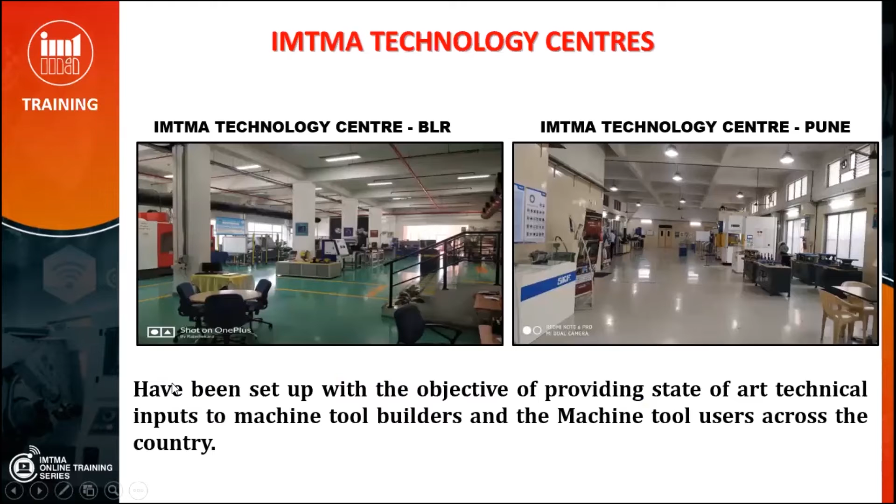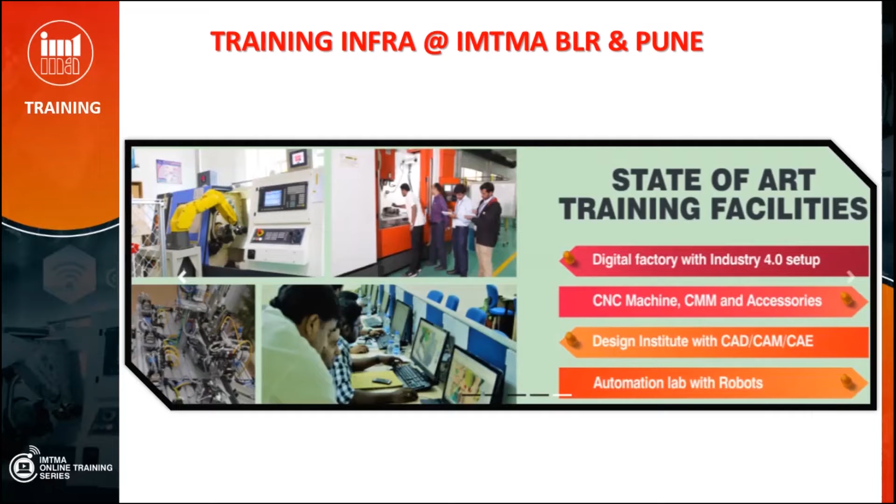Our technology center in Bangalore and the technology center in Pune, each of these facilities are fully equipped with all the requisite machinery, metrology equipment, accessories, automation lab with robot, and is completely Industry 4.0 ready. We deliver our training programs in 4 different ways: short-term programs, in-house programs, e-learning, and long-term courses meant for young graduate engineers.

Our classroom training programs are delivered by experts who have experience in excess of 30 years, with a blend of theory and hands-on training wherever possible. We supplement the programs with demonstration of live machinery or industry visits wherever possible. And we encourage a healthy interaction between the participants and the faculty through the program.

Our e-learning initiative is delivered through an exclusive e-learning portal, and the current portfolio is about 10 programs which can be accessed by the participants at their own flexibility during the license period. The entire program can be taken at their own convenience and flexibility, with assessment, evaluation, and certification being provided through the e-learning platform itself.

Ever since April 2020, we have come up with the online training initiative, and till date, we have completed over 300 programs, addressed over 15,000 participants, and we have made these programs easily accessible to various types of participants, which can be taken up at a minimum training budget. We enable live instructor-led programs with interactive question and answer sessions, polling, chat box, and we also provide live demos wherever possible during these training programs.

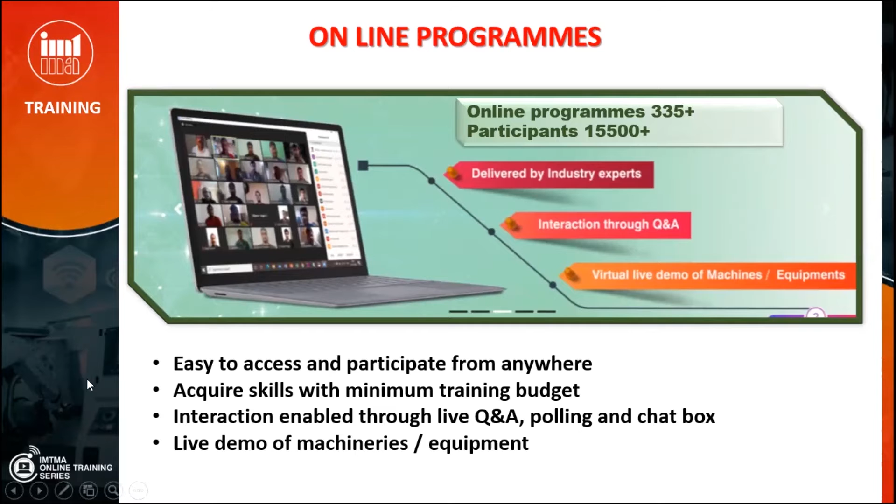Long-term programs are primarily meant for young graduates who wish to improve their employability prospects by taking up a few programs on design, production, automation, FEA, and these programs are available in long-term mode for young engineers.

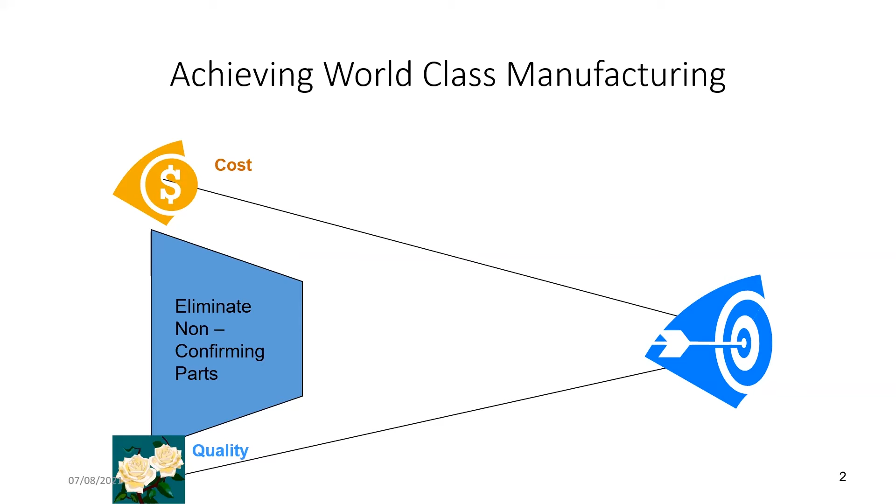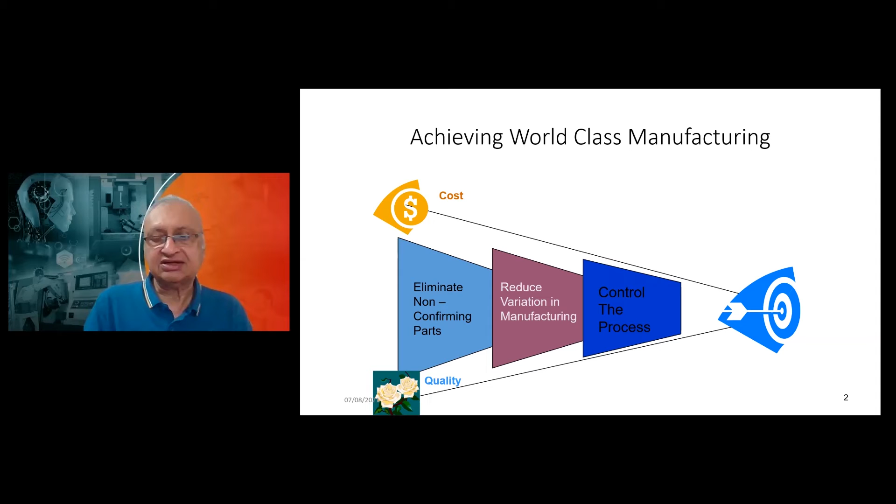However, when a process produces non-conforming and conforming parts together, it means our process has too much variation. So the next step in our journey is to reduce the variation in the manufacturing process itself, so that we do not produce non-conforming parts at all. This is the most important step toward world-class manufacturing, and it means controlling the process itself. Moving from elimination of non-conforming parts, to reducing variation, to controlling the process, is the journey for world-class manufacturing. We cannot control anything unless we measure it, so measurement is key to control of process.

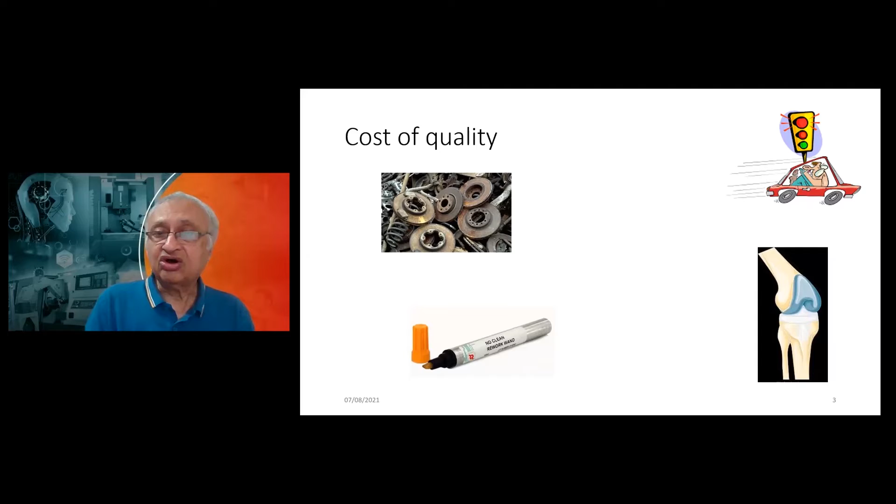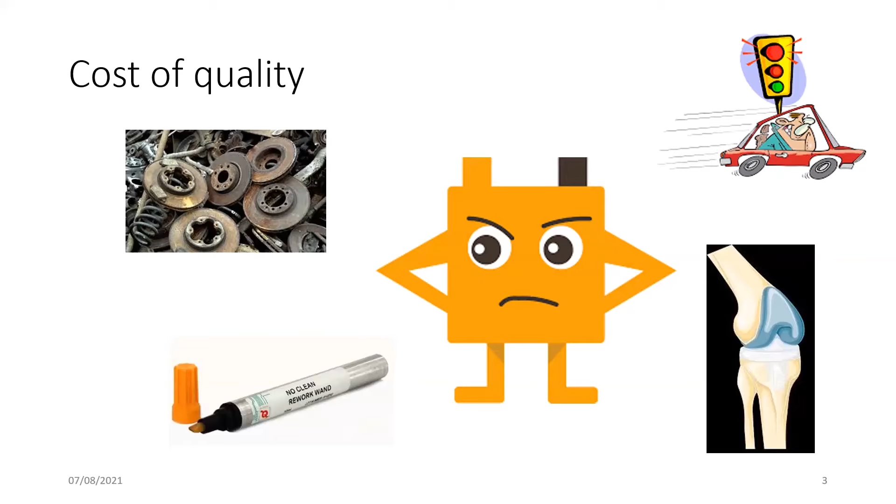A very big cost arises if this quality problem is seen at the customer's end, and you need to do a replacement, like a knee replacement - it's a very costly business. Not only is it costly, it also means your customer is not happy with the situation, because all this results in higher cost, which is ultimately borne by the customer. So anything that helps you measure and control your process ends up reducing the cost of quality.

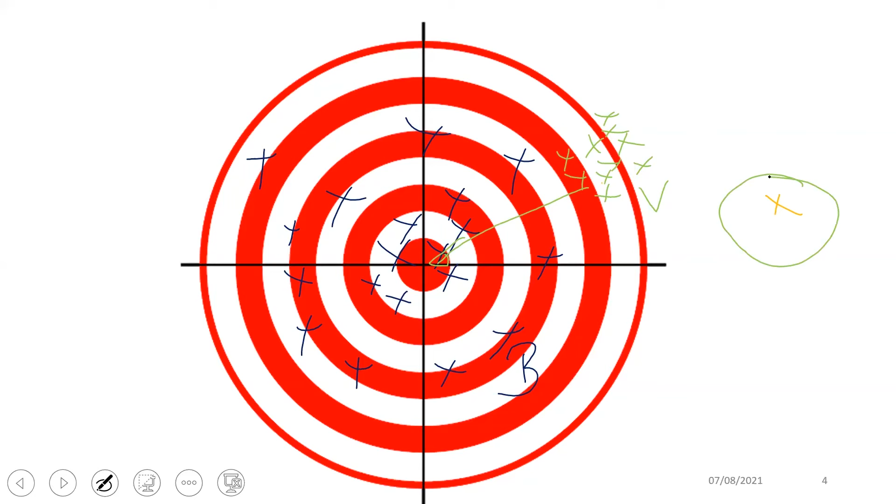So in the language of process capability and SPC, we talk about three possible variations, or three special causes. What we call Vishnuji's situation is known as special causes. Bhupendra ji has common causes.

And this one out here is what we call an outlier. So we have these three types of variations which could have possibly happened in our process: special causes, common causes, and outliers.

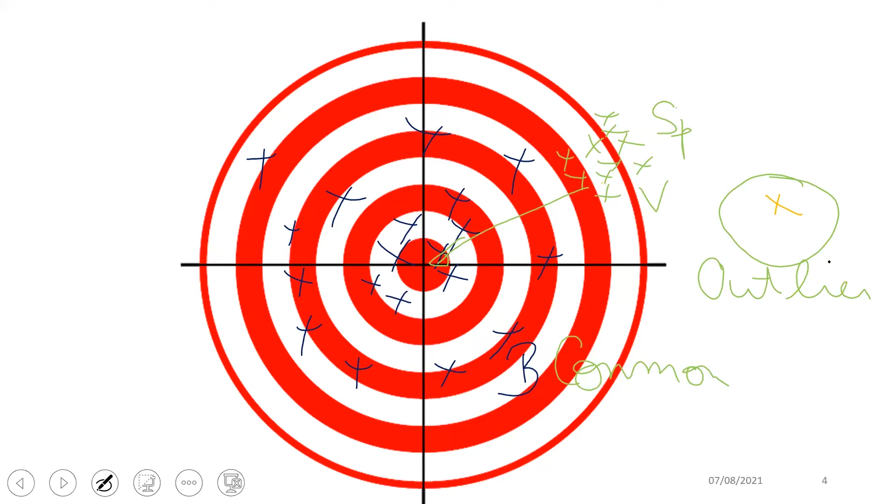However, if we allow many shots over a period of time, I'm sure Vishnuji would have corrected and brought his process to the center. Similarly, Bhupendraji could have possibly made improvements in his process, and hopefully the person who shot an outlier would have corrected his thing.

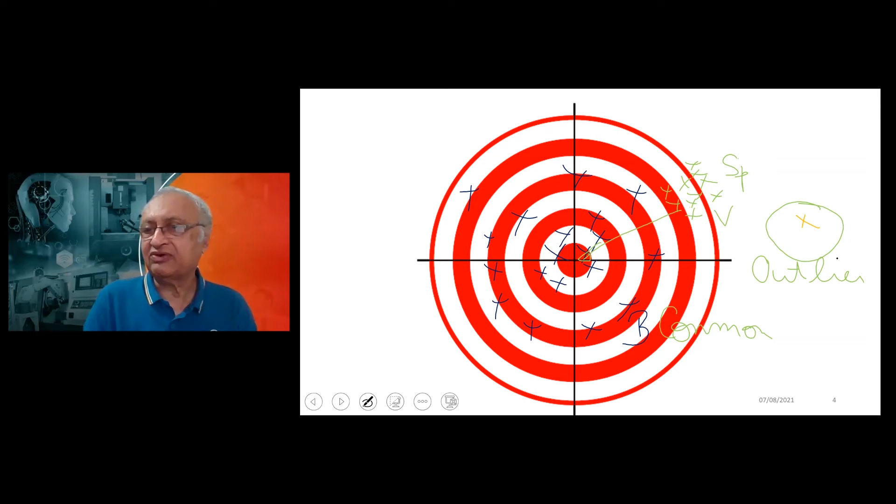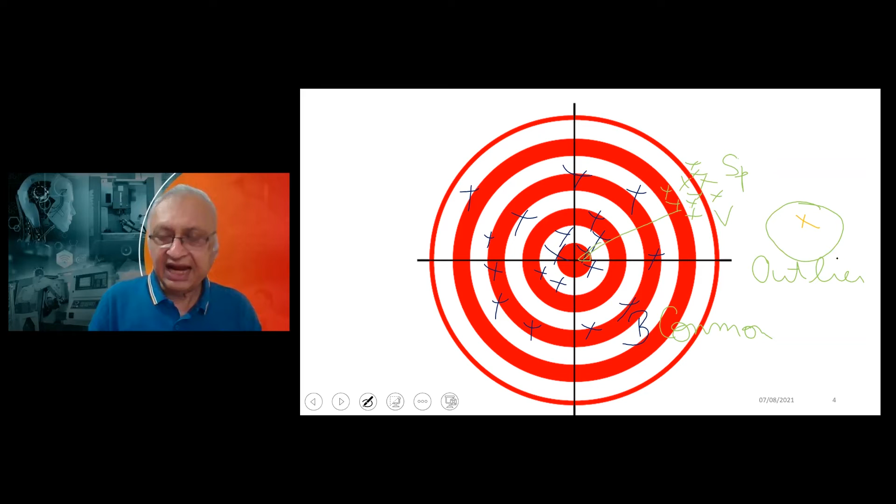Then over a period of time, we find that in most processes we have a distribution which we call a normal distribution. So normal distribution is a frequency distribution. In this case, the frequency distribution of Bhupendraji would look something like this, and that of Vishnuji would look like this. This shows the variation in Vishnuji's distribution is of a much lower amount as compared to Bhupendraji.

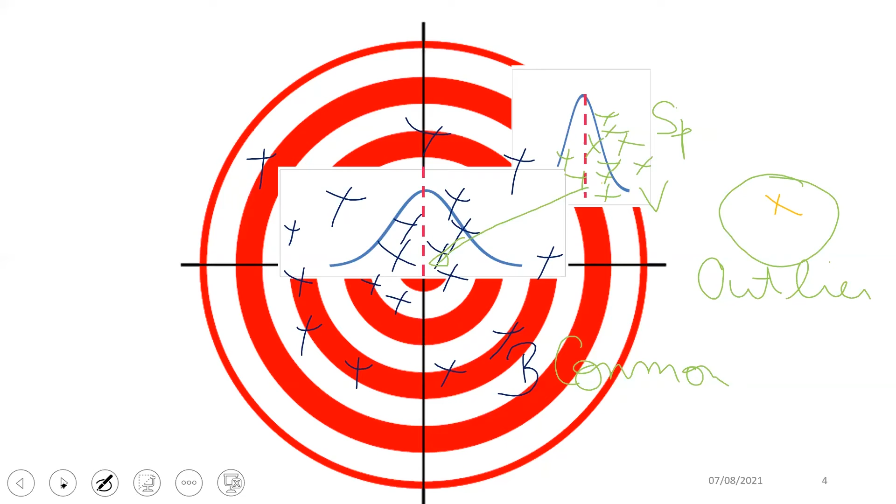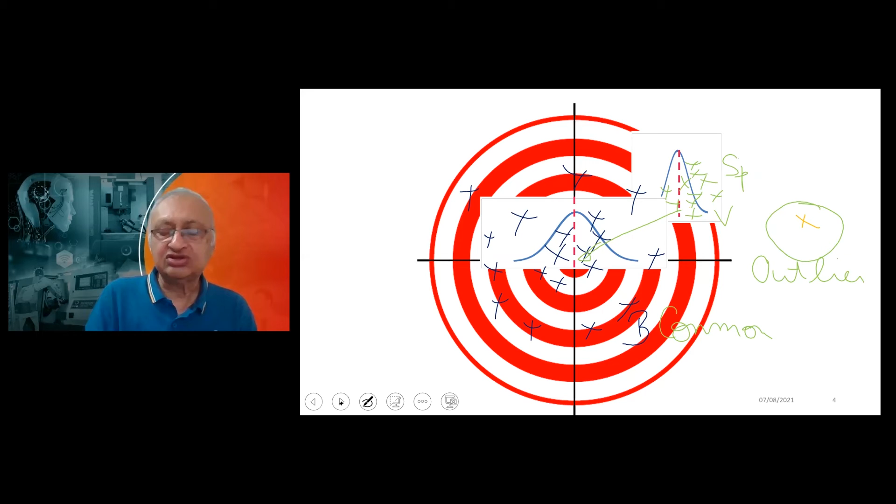So in our terms, we call this sigma or standard deviation. Standard deviation is a measure of variation, and that variation in case of Vishnuji is much less than that of Bhupendraji, though Vishnuji has drifted away from the target. Ultimately, in our processes we would like to produce only conforming parts, in which case Vishnuji would produce some non-conforming parts, even though his variation is low. I hope this is understandable to most of the people out there.

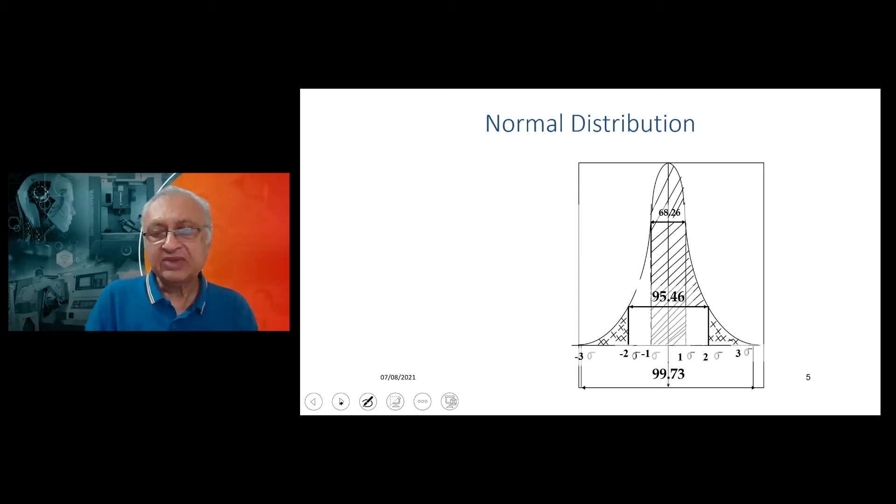So this normal distribution has some interesting properties. If you plot this normal distribution and divide it into different zones, you have the mean, which is at the center here, and then on both sides you have plus sigma, or plus the standard deviation, and minus the standard deviation, and the area under this curve corresponds to around 68% of the distribution.

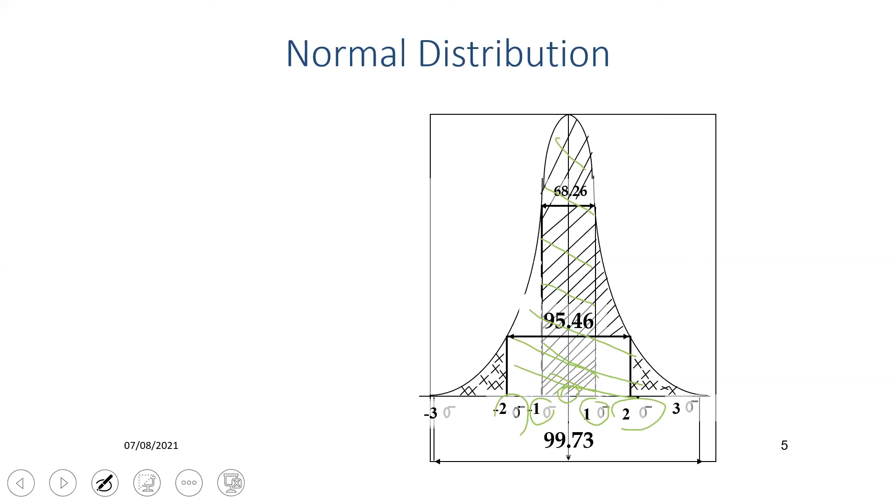If you then take it further up to 2 sigma and minus 2 sigma, we cover a further 95% of the distribution, that is the area under the curve. And if we take up to 3 sigma and minus 3 sigma around the mean, we cover 99.73% of the distribution. What this means is that if we have sufficient data, and if our distribution is that of a normal distribution, which is there in many cases, we would be able to predict that 99.73% of the time, the shot would lie within the plus minus 3 sigma limit. However, you must also note that there is a 0.27% which goes beyond the frequency distribution as shown here.

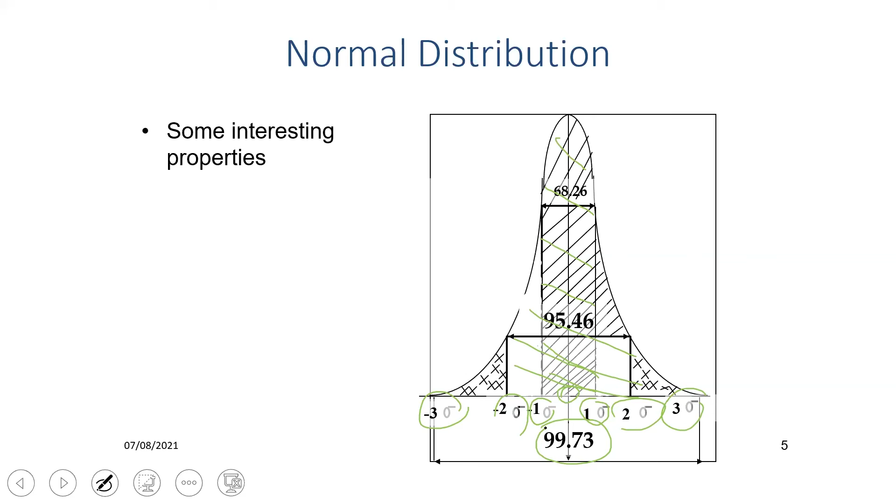So to summarize, the normal distribution has some interesting properties: 68% of all the numbers, or the area under the curve, falls within plus minus sigma. 95% of all the numbers falls within plus 2 sigma and minus 2 sigma. 99.73% of all numbers will fall within plus minus 3 sigma. However, 0.27% falls beyond plus 3 sigma or less than minus 3 sigma around the mean. So this being the mean, we are able to now project and predict what our process is likely to perform in terms of its quality.

This is only true for normal distributions, which is something you must remember at all times, because there are many cases, or at least a few cases, where the distribution may not be normal, and this rule we have stated about the areas under the curve will not follow this pattern.

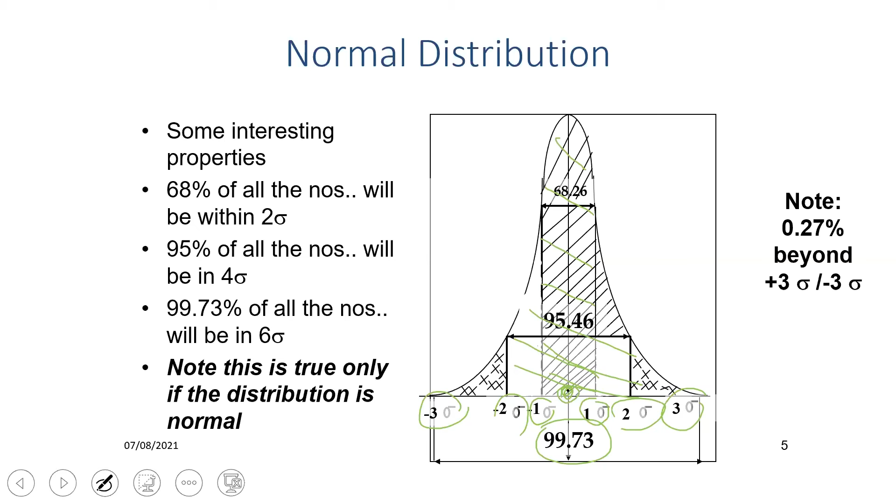So to estimate the standard deviation or sigma, there are two different methodologies used. On an ongoing process, we plot what are known as X bar R charts. If you plot these X bar and R charts, then you can calculate sigma equals R bar by D2. Now, just to explain the plotting of these charts a little bit.

Try to imagine you are in front of a process. Maybe at 7 o'clock in the morning the shift starts, and you take a sample, say of 3 pieces, and you find out the average or mean of those 3 pieces. This is X bar. Now you do the same sampling at every half hour interval: 7 o'clock, 7:30, 8 o'clock, 8:30, and so on. And you keep plotting these X bars. So this is your X bar chart.

Also, you take the maximum and minimum, the difference between the maximum and minimum of each sample, and plot that. That is known as the range, so that is the R chart. So first is the X bar chart, this is the X bar chart here, what I've shown here, and here you have the R chart.

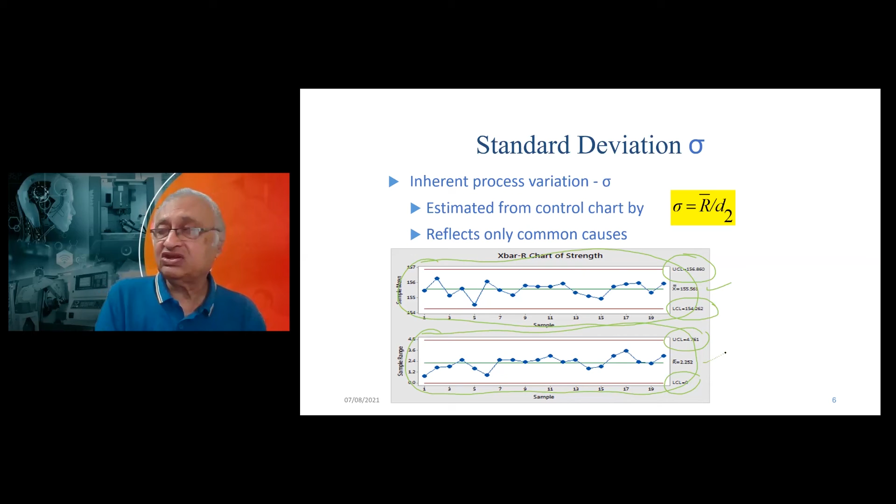In case of our friend, the second person B, the plots would lie within the upper control and lower control limit, which means that he is lying within the plus minus 3 sigma limits, and we are able to predict what likely he is able to shoot over the next, say, maybe 10, 15, 20 shots.

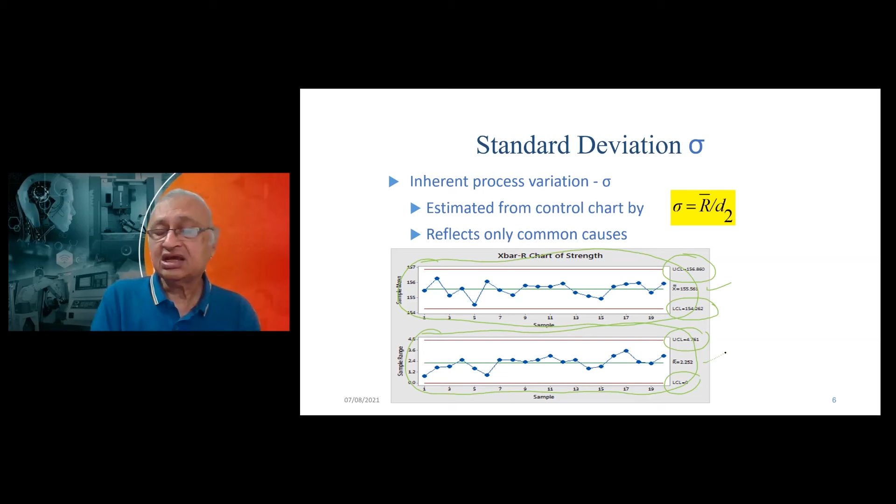So this is how control charts are used to predict the process. It's a measurement of the capability of the process. But please note, this has nothing to do with what you expect as a customer. We are only talking about the variations, the inherent variations of the process caused by common causes.

So this is the method of measuring sigma and finding out the limits plus 3 sigma and minus 3 sigma, so that we are able to predict where 99.73% of the parts will lie. That means that many conforming parts this process will continue to process and manufacture over a period of time.

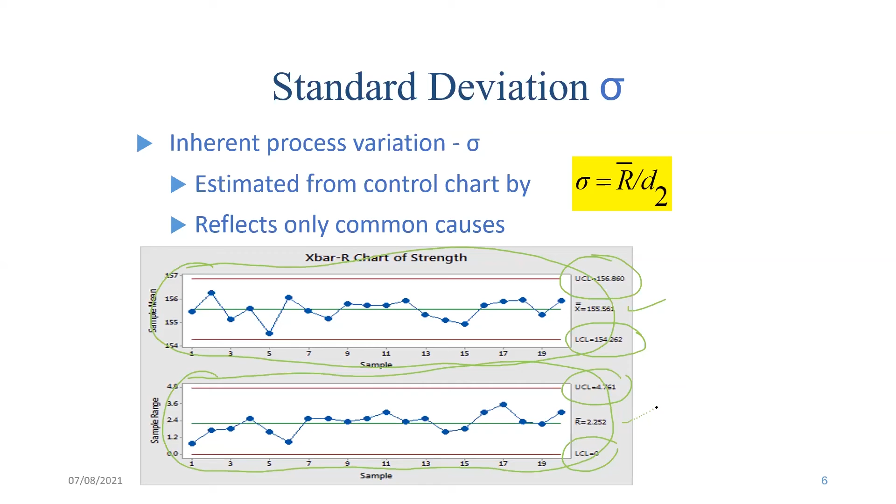There is another way to measure the standard deviation, and that is by a formula, and that's sigma. To differentiate from the other one, it is sigma s, which is the square root of the sum of xi minus x bar, each squared, divided by n minus 1.

Now xi here is an individual reading. X bar is average of all those readings. Each of them is squared, and then you sum all of them and divide by n minus 1 and take the square root. So this is known as the total process variation.

So now you can imagine that unlike a control chart, here is a case where you have a bin which may be around 500,000 pieces lying in it, and you are drawing from it a sample of maybe 50 or 100 pieces, measuring each and every one of those sample pieces.

Find that is the xi. Xi means x1, x2, x3, etc. Finding out the average of all of them, that will be the x bar. Finding out the difference between x1 and x bar and squaring it, and adding to that x2 minus x bar squared, and so on and so forth.

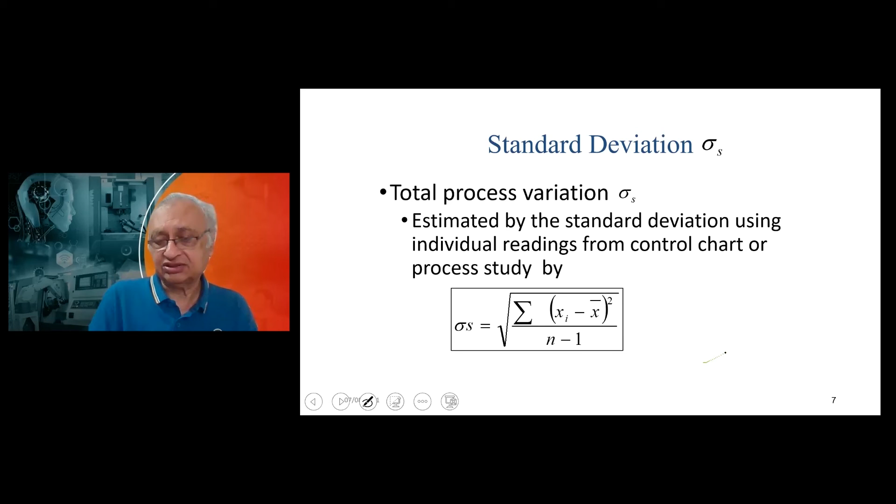So here you are not really worried about when those parts were being produced. So this is not for process control, but this is a post-mortem exercise to find out the quality of the parts in a lot. So this is the difference between sigma and sigma s, and we will see how we use sigma and sigma s in the next few slides.

So now we know what my process is capable of producing. The next part is I would now like to know, will it produce good parts for me in future or not? Which means I must compare what my process is capable of to the target itself.

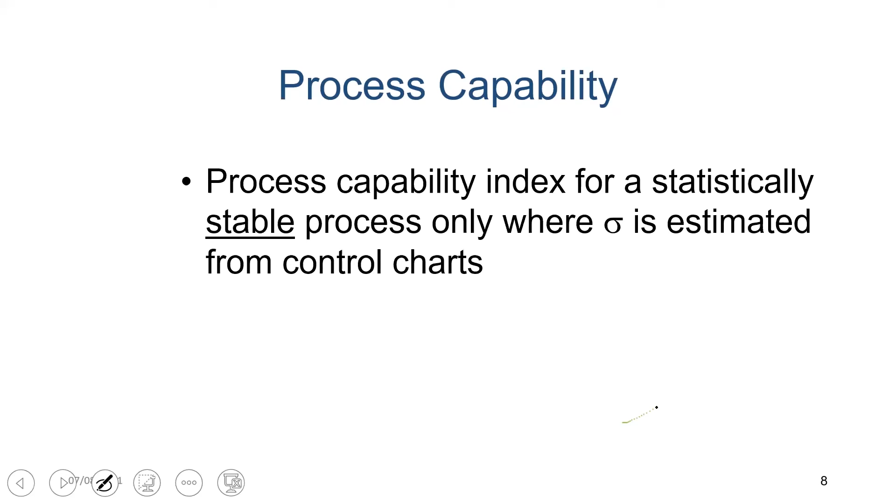So this is what is known as the process capability index, or CP, for a statistically stable process where sigma is estimated from the control charts. The formula for CP is the total tolerance divided by 6 times sigma.

So if CP is greater than 1, which means that the tolerance is greater than 6 sigma, which means that you will get 99.73% parts which are okay in the process.

So this is how a process capability index is worked out, and this is how you measure the process capability of a particular process as compared to its tolerance. So I hope it is clear that we are trying here to compare the tolerance, that is what the customer wants, to what the process is capable of, which is 6 times sigma.

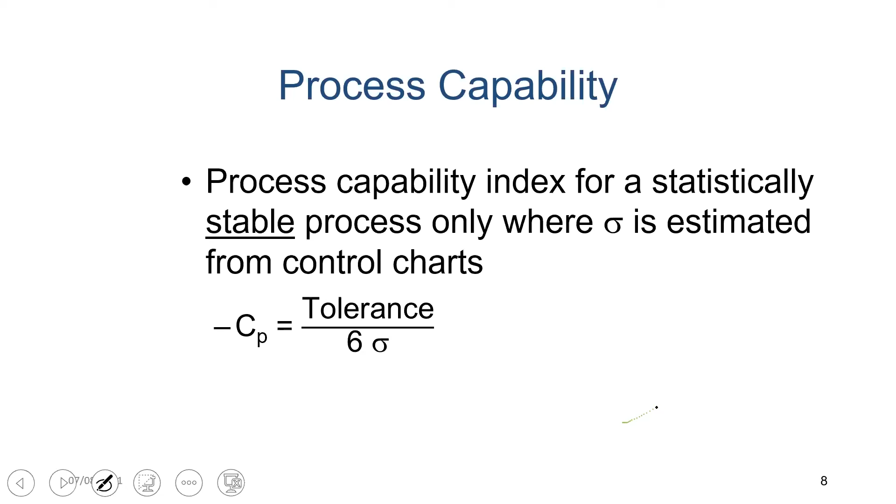So CP greater than 1 would mean that we will get 99.73% parts which are correct.

This is also known as the short-term process capability index, because this exercise is done from control charts over a short period of time.

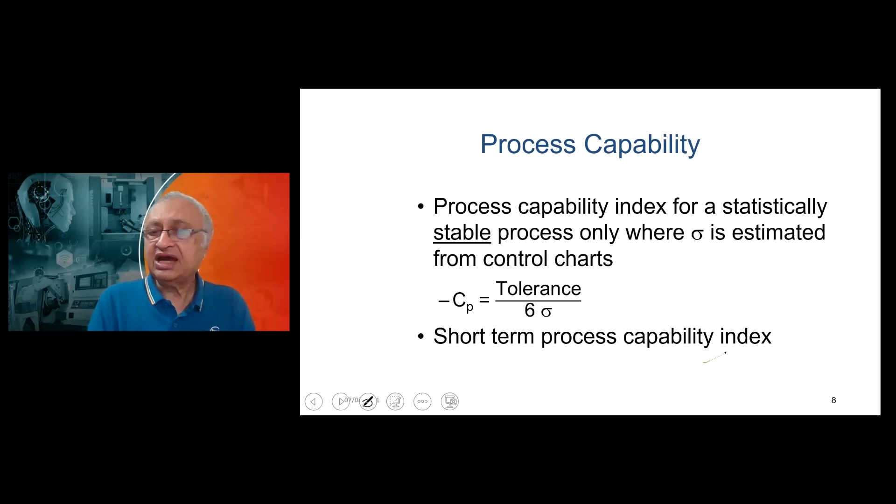However, if this exercise were carried over a much longer period, maybe a month or two, and we had all the individual readings of the parts, then we would use sigma s in that formula rather than CP. So here it will be PP, which is the tolerance divided by 6 sigma s. This is the long-term process capability index, also known as the process performance index.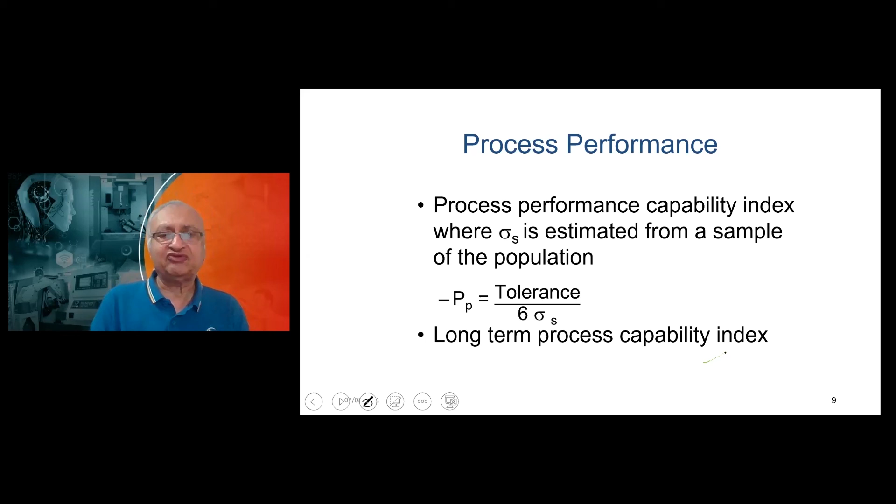So the difference between the process capability index and the process performance index is simply which sigma we are using. If we use sigma, it is CP. If we use sigma s, it is PP.

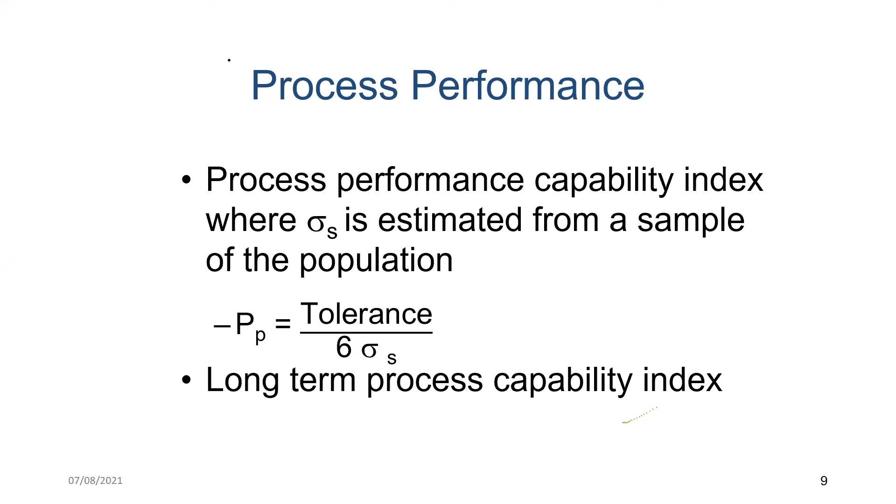Now if we move forward, there is another index called CPK. This index tries to find out the difference if the process shifts away from the center line. If the process shifts away from the center line, that means your process centering and your tolerance centering are not the same. So what happens in this case is that we measure two indices, CPU and CPL.

The formula for CPU is: upper specification limit of your tolerance minus X double bar, or the process center, divided by 3 times sigma.

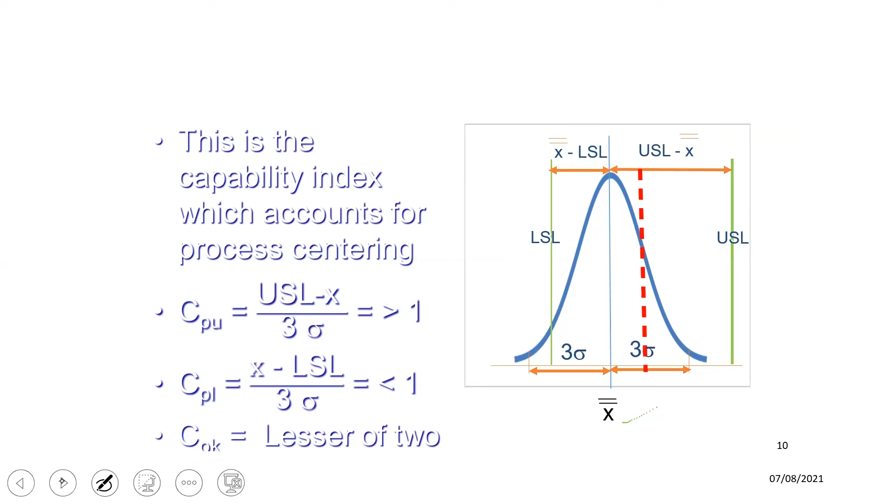The CP lower, or CPL, is X double bar minus the lower specification limit, or the lower value of your tolerance, divided by 3 times sigma.

After calculating CPU and CPL, we take the lower value of the two. So if CPU is greater than 1, as shown here, and CPL is less than 1, then CPK will be equal to CPL. This means that even though CP may be greater than or equal to 1, we may still produce certain defective parts, shown here, because this has gone beyond the lower specification limit.

If CPU is less than 1 and CPL is greater than 1, then we would know that our process center has shifted towards the upper specification limit, and we are likely to produce non-conforming parts above the upper specification limit. So this is how one uses the process capability index CPK.

Corresponding to CPK, we can also have a PPK, wherein we have PPU and PPL. The formulas are all the same, only the sigma is different — for PPK we use sigma s in place of sigma, which we use for CP.

So CPK is a measure of process capability that tells you if your process variation is within the tolerance or not, and to what extent there is a shift of the process compared to the tolerance mean.